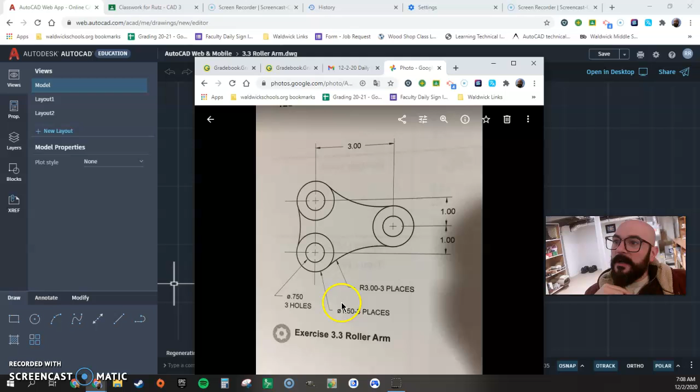Let's look at what this says. The name is 3.3 roller arm. There's no M, so it's imperial, not metric. Looking at the comments, we have 1.5 inch diameter in 3 places, so these 3 circles are going to be 1.5 inches. Then 0.75, 3 holes, so these are 3/4 of an inch, and it's a hole. And then we have radius 3 inches in 3 places. 1, 2, 3. Excellent.

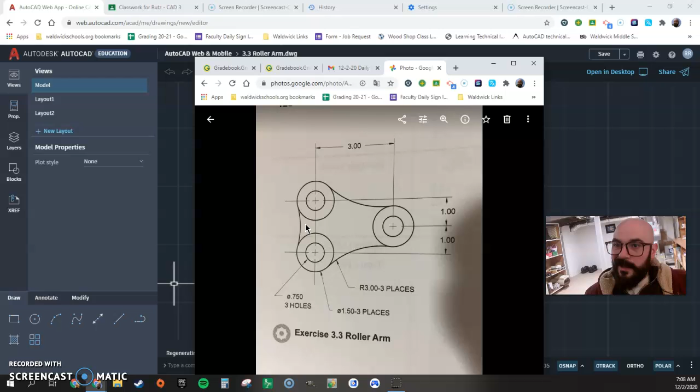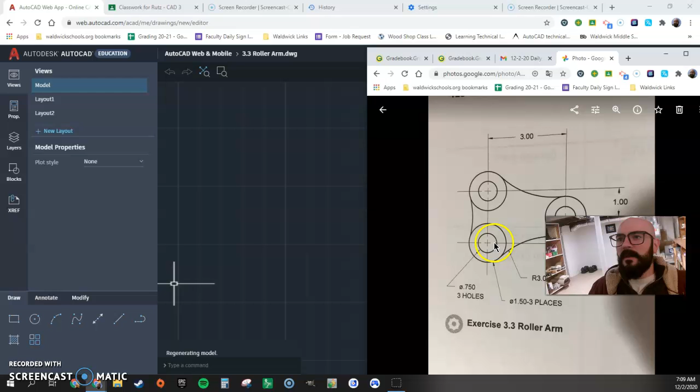Let's try this out. The way I would approach this, I would use those center marks along my axis, because here these are perfectly in line and clearly definable. Since this is on the y-axis, the x coordinate will be 0. I'm going to move this out of the way and just do my stuff here, which I'll refresh.

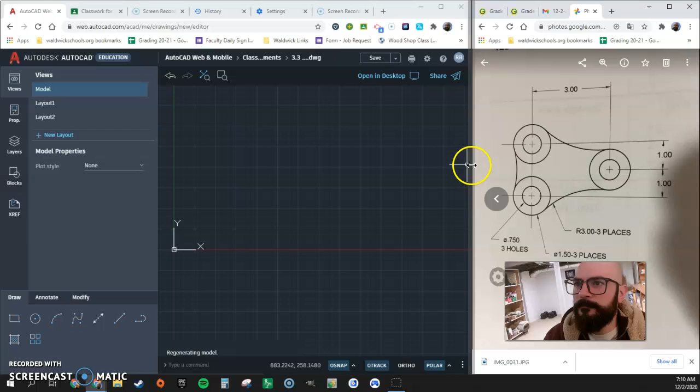It seemed to act a little funny. All right, so I'm going to start. I almost wonder if I could do a little bit of this action for you. Okay, yeah, I think that works.

So I'm going to start with my circle, and my center point for that bottom left one is going to be 0, 0. I type in my coordinates, press enter, and now it's saying specify radius. I'm going to start with the inner circle, and if it's 0.75, then it's going to be 0.375. Alternatively, it's also 3/8, and you could just get a calculator for this.

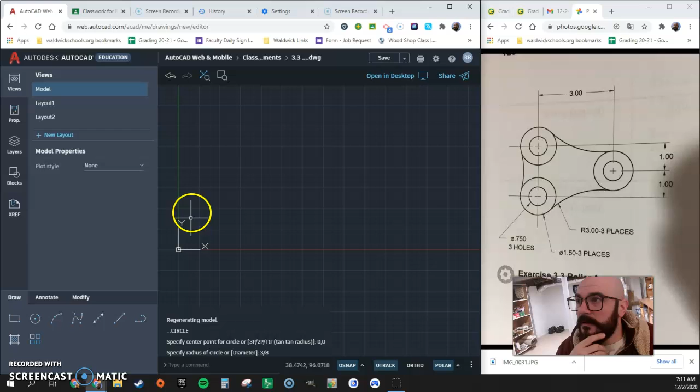Now I'll zoom extents. Boom, great, we got a very small circle. It doesn't look like a circle, but it knows that it is a circle. Sometimes it draws things kind of rough. Let's continue though, we're making another circle.

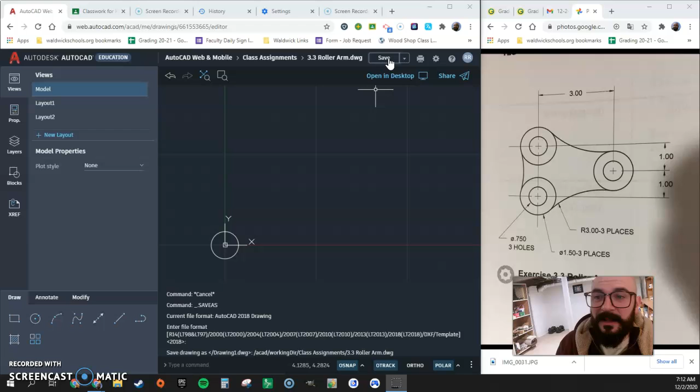Alright, it kicked me out of AutoCAD. I tried it, I just had to remake this thing. I'm going to recommend clicking save every so often, pretty frequently.

So now we're going to do another circle at 0, 0, and the radius of this one is going to be 0.75. I get this from the dimension they give me. Enter. Great, now I'm going to do this upper circle because that one is easier for me to find. Save.

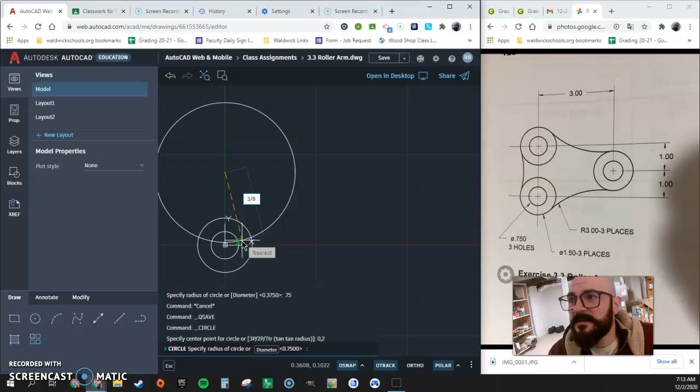Click the circle tool, and here it's still on that y-axis, so the x-coordinate's 0, and I see that it's got a height of 2. Same deal, 3/8, and we can also do our other circle. Let's do that. Center point 0, 2, and 0.75 inches. Enter. We now have our 2 circles up and vertically on top of each other.

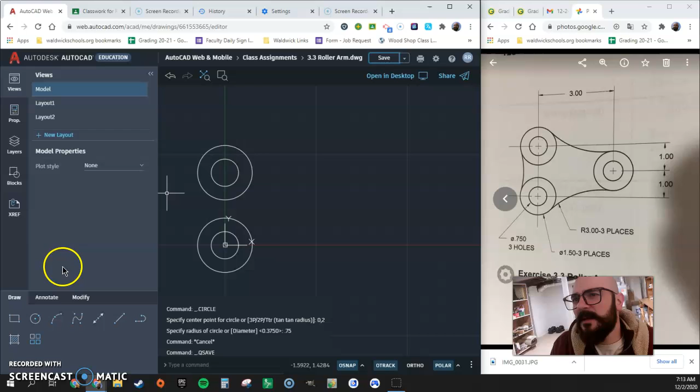Now we need to identify this center point. To do that, you could type in the coordinate, but I just want to show you another kind of quick way to do this. I like showing you different methods.

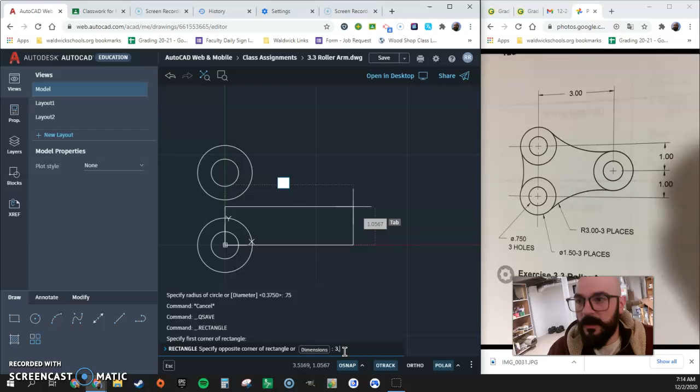So what I'm going to do, I'm going to draw a rectangle and set the coordinates to the center point. Just follow me here. I see it's over 3 and it's up 1, so it's 3, 1. I have to specify here 3, 1. If I were to type it in there, it would mess up because it was asking for a distance. Don't want that, I'm just trying to type in coordinates.

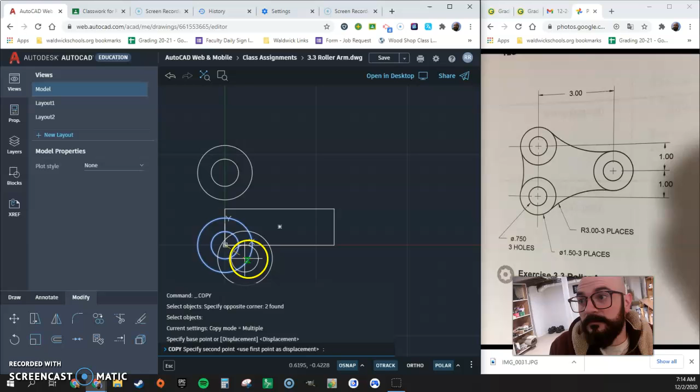Now I'm going to use a modify tool I've brought up before, copy. I'm going to select my objects, using the green selector, which will select anything that it touches. I now press enter, specify the base point, which is the point I move it from, and now I'm going to snap the center of these two pieces right to that rectangle. I can now select the rectangle, delete it, so it's no longer in my drawing.

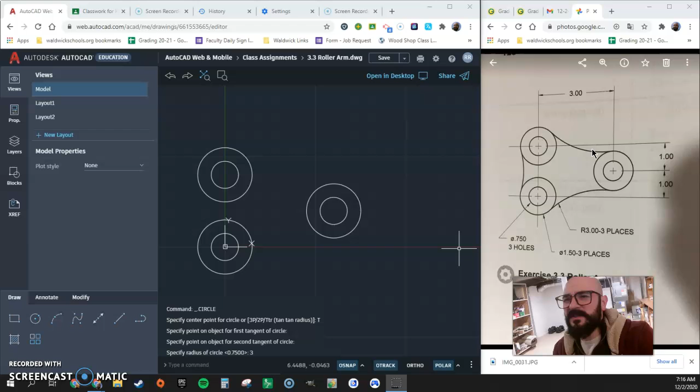Save. Alright, now this drawing is a little tricky because we have these radii that we have to insert, but we don't have the ability to use a fillet tool. So what I'm going to do is generate circles using a different command line.

Okay, we're going to get that circle tool and look at the options. 3-point, 2-point, TTR, tan radius. That's the one I want. A tangent line is a line that only touches the edge of a circle at a single point.

So I'm going to select this, and it says specify point on object for first tangent. I'm going to select here, this is the first circle I want to have a tangent line to. Now specify point on object for second tangent. Boom, click here. Now I specify the radius.

Looking at this, it tells me the radius is 3, so I'm going to type 3. And look at that, we have an arc tangent to both circles with a radius of 3.

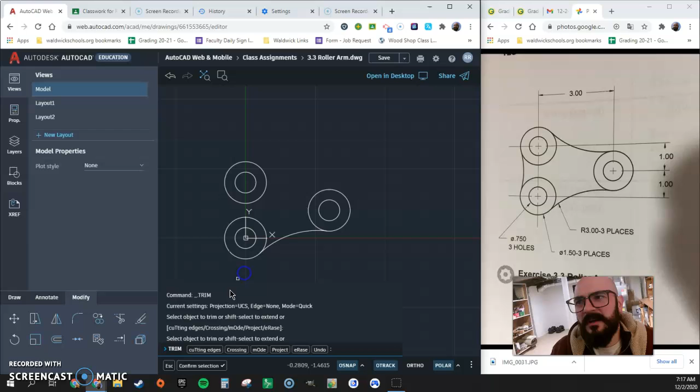Since I have a full object but I need to chop it up, I'm going to use that trim tool. Once I select it, it's going to allow me to chop up that object and only keep the parts I want. Great, save it, and let's continue that.

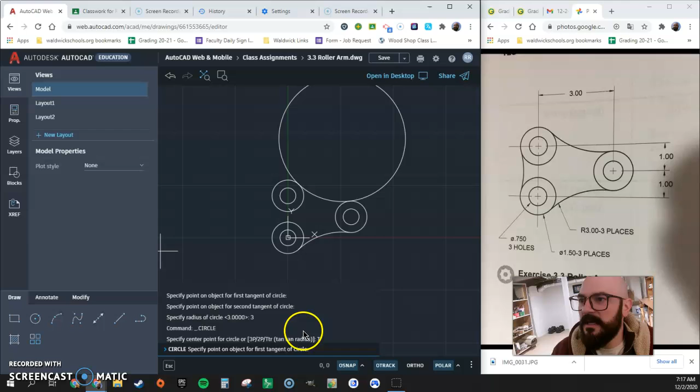Draw tan radius. Tan radius 3. Enter. Good, circle. Tan radius, there's my tangent, there's my tangent, radius of 3. Trim tool.

1, 2, and I now have my object. Save it, because now we have to add our dimensions, our center lines, and things like that.

So for that, I'm going to go to my layers. I need to make some layers. Let's call our layer 1 center, and the other one is going to be dimensions. Now, dimensions...

I tend to do yellow for dimensions, center lines I tend to do red. Now, staying in center, center line should be a center line. Dimensions, continuous solid. Great.

Properties. So what we need to do for our center lines, let's set the size, or the scale of it, equal to the size of this inner circle, or the radius of it. So line type scale is 3/8.

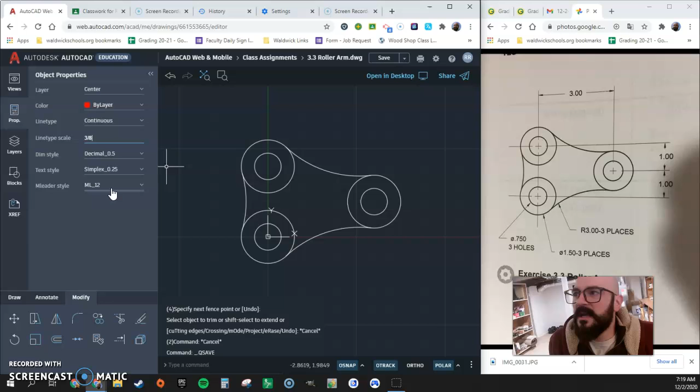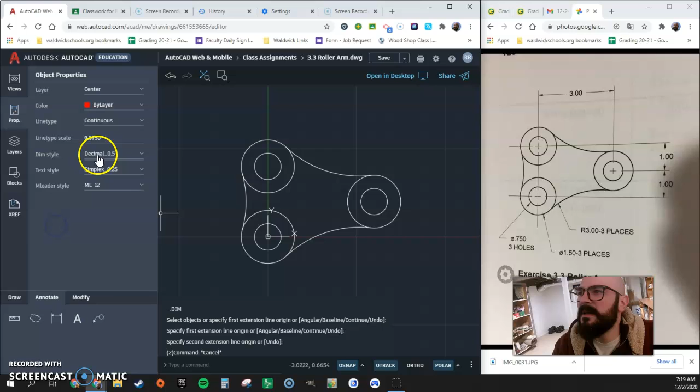Now I'm going to get my dimension tool. Oh, I have to change my text, so my text style, if I don't change that, it's going to look big. So here we have simplex, or dimension style, excuse me. Let's go to decimal point 2. Dimension here.

That's not right, I'm not trying to dimension, I'm trying to draw center lines. So I'm going to use my line tool. Boom, boom. Oh boy, looks like our scale is not good, seemingly too small. So let's make that 0.75.

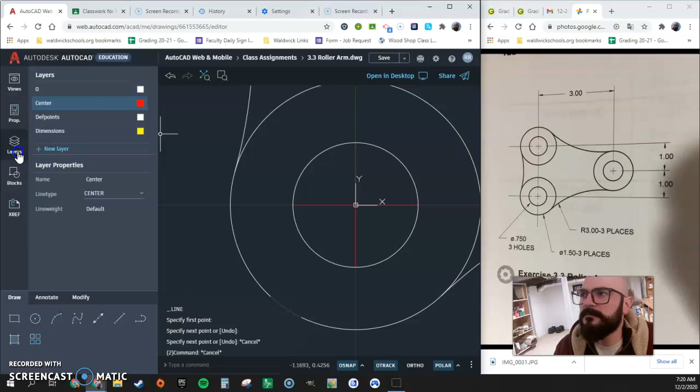Anytime that I make a change, it will not reflect in my drawing. Center. Line type is center. For some reason it didn't change that, but okay, now it's too big. Let's go back.

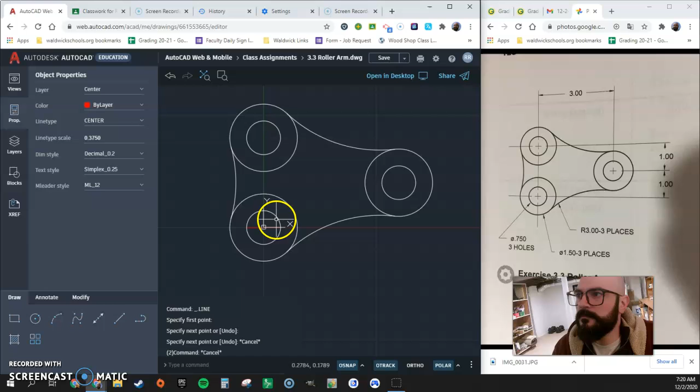And we just got to pick a scale that makes it look like a center line. Looks like we got it. Good, good, we now have center lines here.

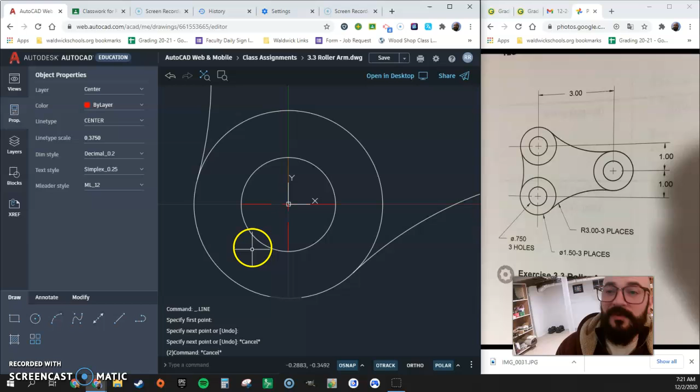And now we're going to use that same trick that I showed you before. Now we have the axis in the way, but we see that the center line is really set up nicely with that circle. So what I'm going to do is get my copy command. I'm going to select 1, 2, hold shift, press enter, base point the center, copy it there, copy it there. You should have a center snap point.

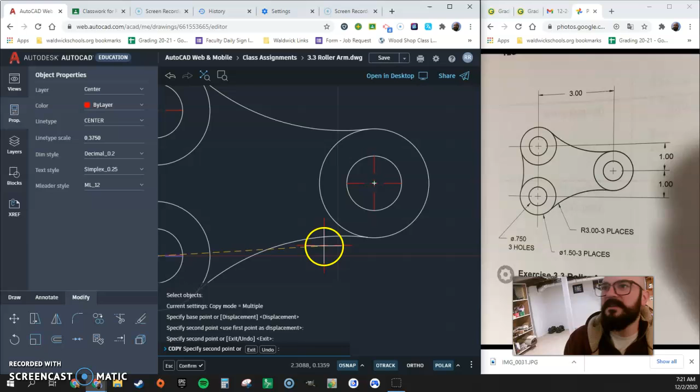If you don't, you probably don't have your snaps set, so make sure that you have all your snaps. All right, we have center lines. Now we need dimensions. I press escape to get me out of the drawing tool, and now I'm going to change to my dimension layer.

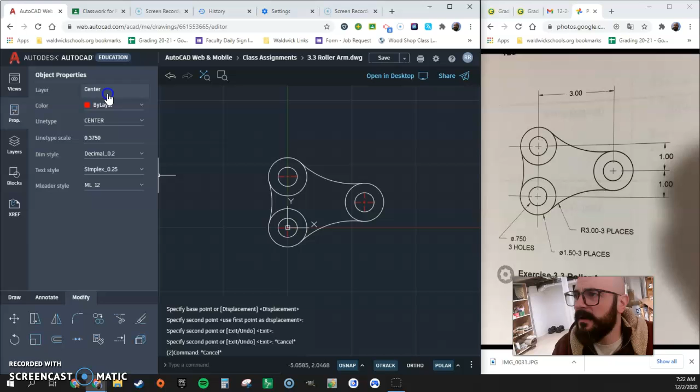Okay, line type for this is continuous. Let's see how it runs. Let's get our dimension tool. Boom. And now I just hover until it's perpendicular. We can set up our dimension here. Looks good.

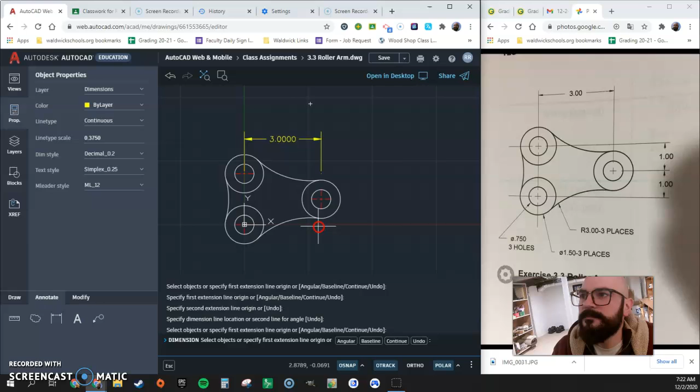Now dimension here, I'm going to hover but not click, I'm just going to drag it out until it's perpendicular. Put in another dimension, and then let's do one more. Click here.

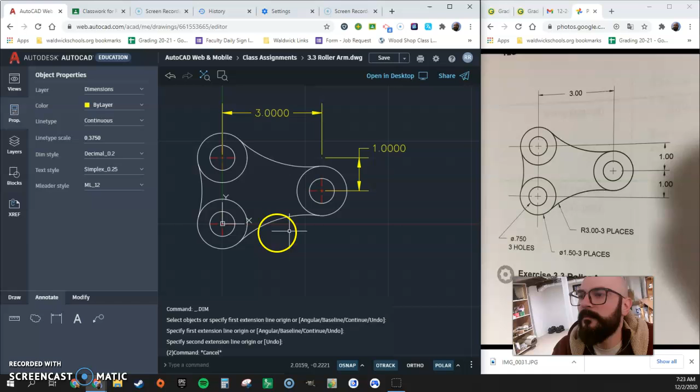Must have missed something. Let's try it one more time. Dimension here. There we go. I want my information to confirm the correct stuff because it was saying 1.0003 - that's not 1, however close it may be.

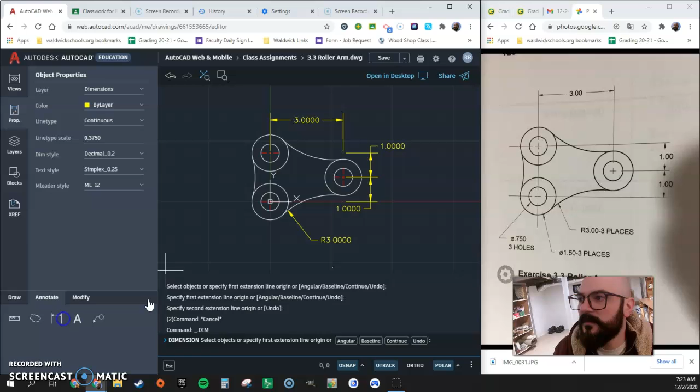Now I'm going to dimension this radius, and I'm going to dimension circle 1. Let's get that. There we go. And we're going to just move around until we get the radius that we want. That's good, and then one more.

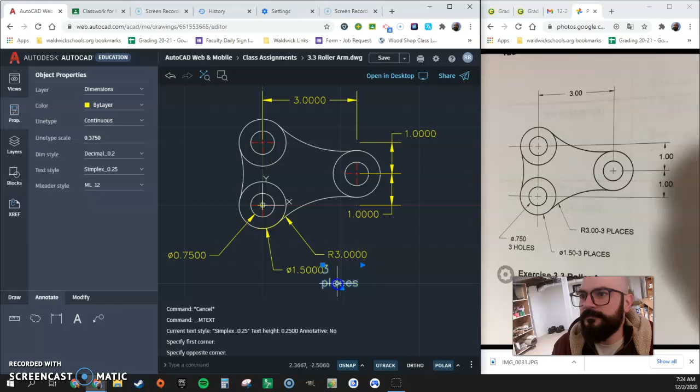Because right now it's giving me some weird snap points. Now it's giving me the diameter that I want. And you could adjust this by adding text. Let's see, let's say, was it 3 places? We could just... there we go.

And now, moving it around, 3 places. And let's copy and paste that. I double click the text to change it to holes.

And it doesn't look perfect, but we're just getting basic understanding at this point. I'm not trying to be completely perfect at this point. Let's just move that. Nope. Undo. Alright, that's fine. Now we have to get it into paper space.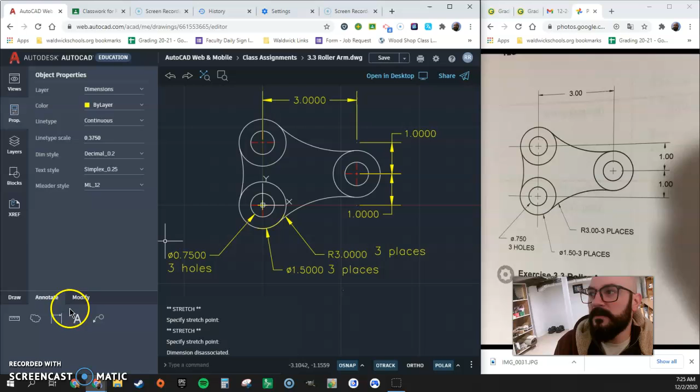I'm going to do this quickly. Views, Layout 1. We are going to double click into here. We're going to do that. Oh, there we go, now I'm in here.

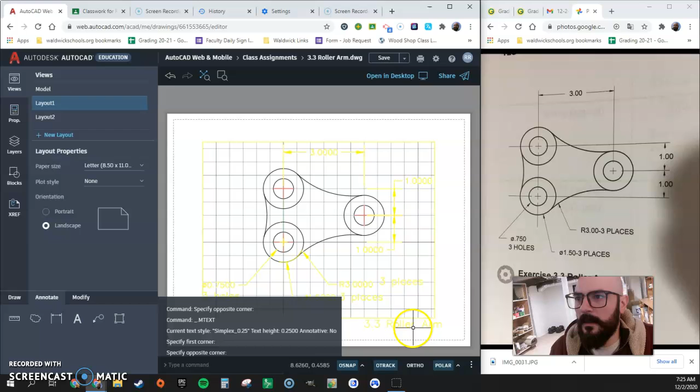I can add my text, and I'm just going to put 3.3 roller arm. And now I'm going to plot style, monochrome. And you could take a snip of this. You could also change your text to be black. That's it.